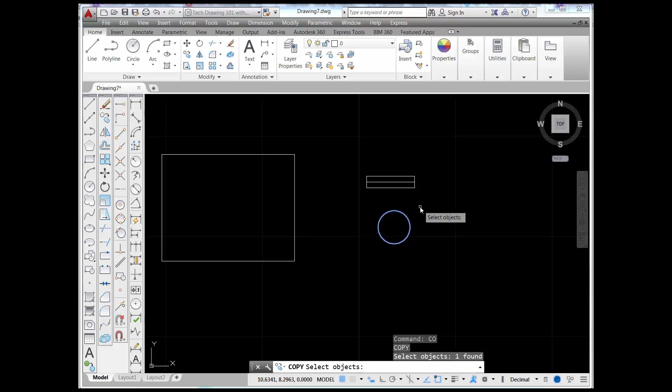Okay, so I'm in the copy command, and the first prompt says select object. So I'm going to pick on the edge of this circle, and you'll notice that after I pick that circle, it's still prompting me to select objects. Now, if the circle is the only thing I'm going to copy, I want to press Enter. As soon as I press Enter, I'm prompted to specify the base point for the copy.

I like to think of the base point as the handle that I'll be carrying this object around as I make copies. So it kind of makes sense to choose the center of the circle for the base point, but I could snap to the quadrants, or I could even choose a point off the circle out in space for the handle, if that made sense. But in this case, I'm just going to pick on the center point.

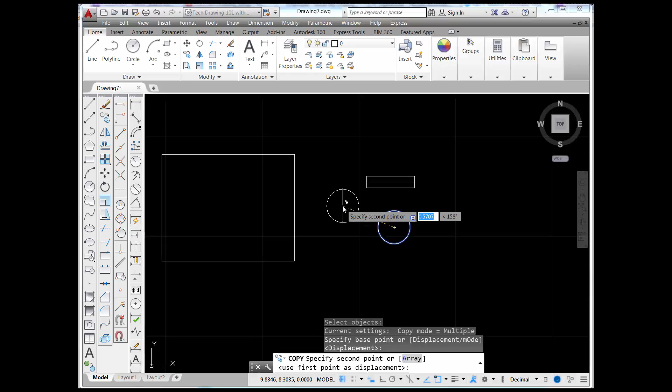Now it asks me to specify a second point or a displacement, so it really wants to know where do I want to move that to. If I come up here and pick right at the end point of that line, and then pick at the end point of this line, you can see it's making copies. If I snap to the midpoint of the line, and to the midpoint again, it will make multiple copies until I end the command. So I'll just keep going around here snapping and making copies.

Now it's still wanting to make copies, and another option I would have is to turn ortho on. You can see that with my polar tracking I can move perfectly to the right, I could move perfectly down, I could move straight up.

So let's say I want to move straight up and type 1 and press Enter. That would make a copy 1 unit directly above my original. I'm going to move to the right, type 2, and press Enter, and you can see that it copied this 2 units out.

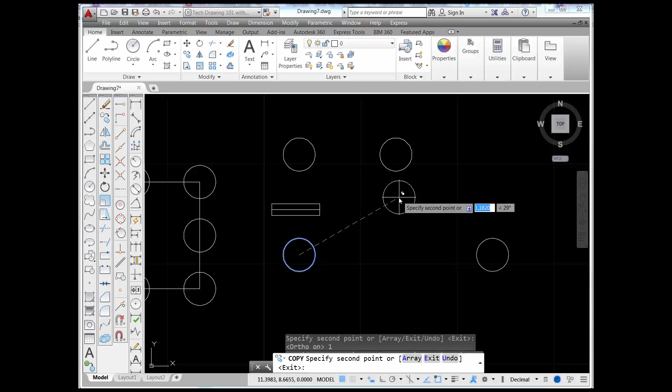Now I'm going to turn ortho off for a second. What if I wanted to go off at an angle? Let's say I wanted to copy over 1 and up 1. I would type 1, comma 1, and press Enter. Starting at my base point, it moves over 1 and goes up 1, so it does an XY move.

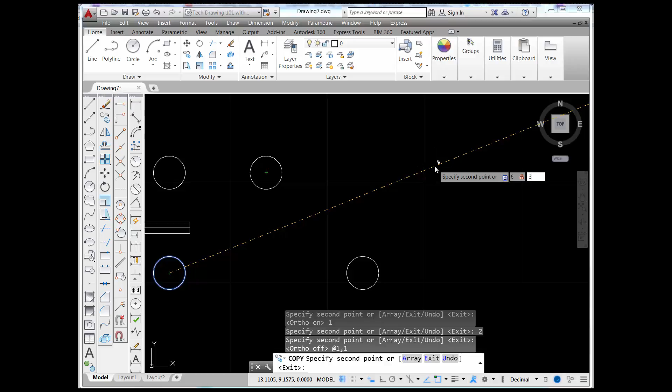Now, what if I wanted to move it 6 units at 30 degrees? So it would be somewhere out here. Here's what I would do: I would type 6, then press the Tab key, which indicates to AutoCAD that the next thing I enter is going to be an angle, and I'll type 30 and press Enter. Now I probably have to scroll out a little so I can see where that is, because at the scale I'm drawing at, that is 6 units right there.

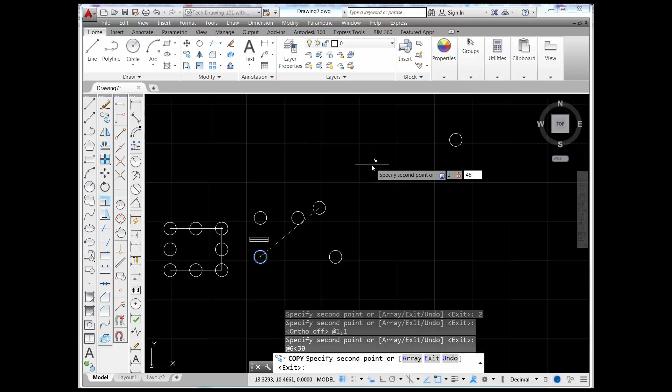So let's try it again, and let's do 2, Tab, 45, and press Enter. Alright, so that's where that one wound up. So I'm going to press Escape.

So that is how you use the copy command. You can make multiple copies of whatever it is you're trying to do.

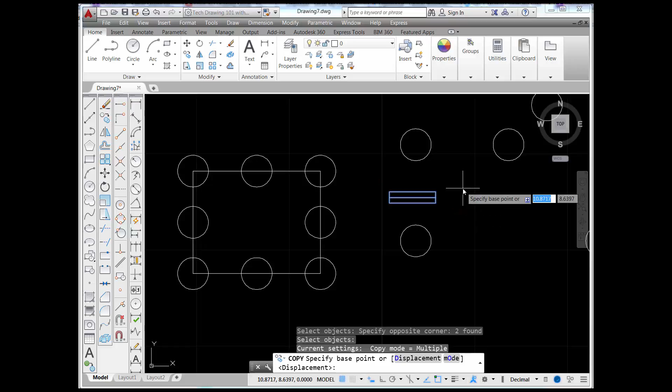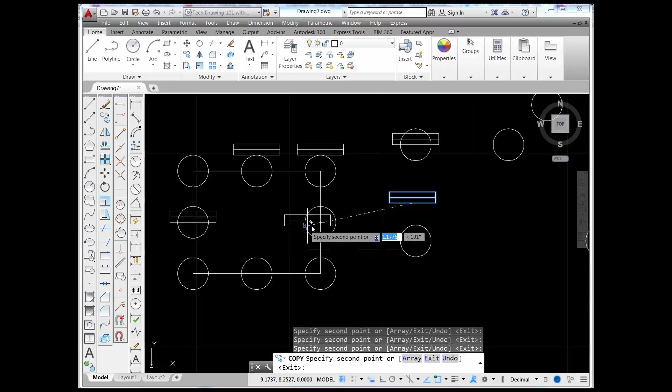Now you can also copy things that don't have to be circles. You can window something, press Enter. When it asks for the base point, you could pick an end point, a midpoint, whatever makes sense to you. So I'm going to pick on this midpoint, for example, and I could even snap to the center point of that circle, or to the quadrant of this circle, and to the quadrant of that one, or to the midpoint of this line running up and down on the side of the rectangle, or over here, and then press Escape to get out of the command.

And that's the copy command.